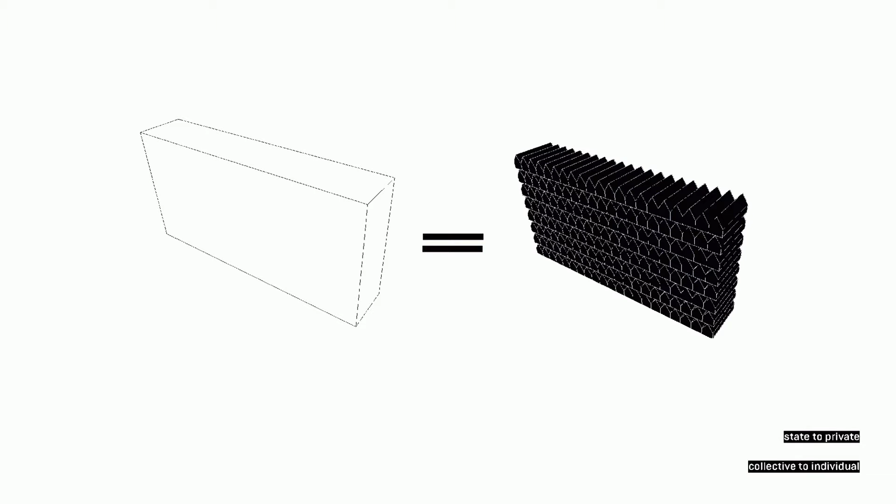So as this image shows, there has been this shift from queuing due to scarcity to queuing because of hyperconsumerism. And there has been a shift from this thinking of extreme collectivism to extreme individualism. There has also been a shift from everything completely state-owned to everything completely privately owned.

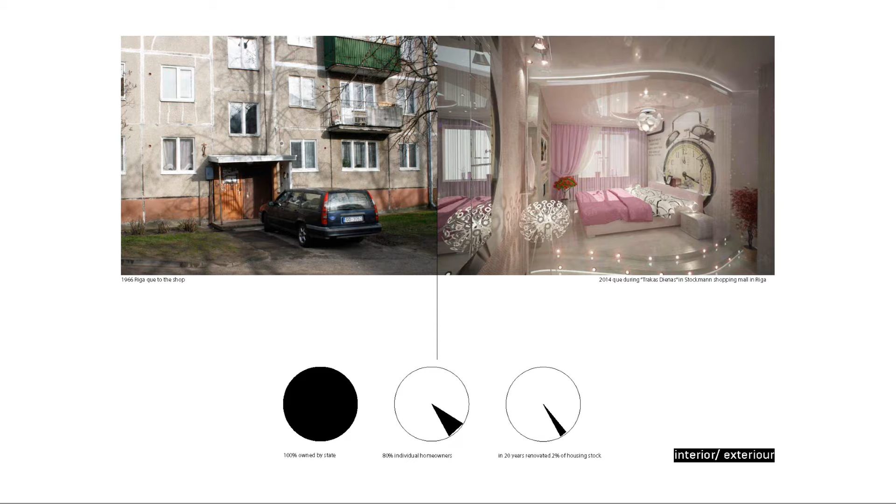And as many images have shown before, like Dean showed, there's an obvious urge to renovate and to improve your home conditions, but there's also this unwillingness to cooperate, which has led to the fact that only 2% of the exteriors have been renovated. And you can see this obvious clash between these highly designed interiors and these very bleak exteriors.

And if we look at the current economic conditions of Latvia, Latvia is one of the poorest countries in the EU and has one of the lowest median incomes. But there's also quite a high income gap, so some people do have money and some people don't. And there's quite a high percentage of people living on the border of social exclusion.

So this leads us to our urban analysis, because we were interested in seeing how this economic history is reflected in the urban tissue of Riga. At the beginning of the 20th century, Riga was mostly centered around the city center. But during Soviet times, heavy industrialization led to the expansion of the city. And there was then the need to house the workers, and the idea that you should live and work in the same place, i.e. the development of the microrayons.

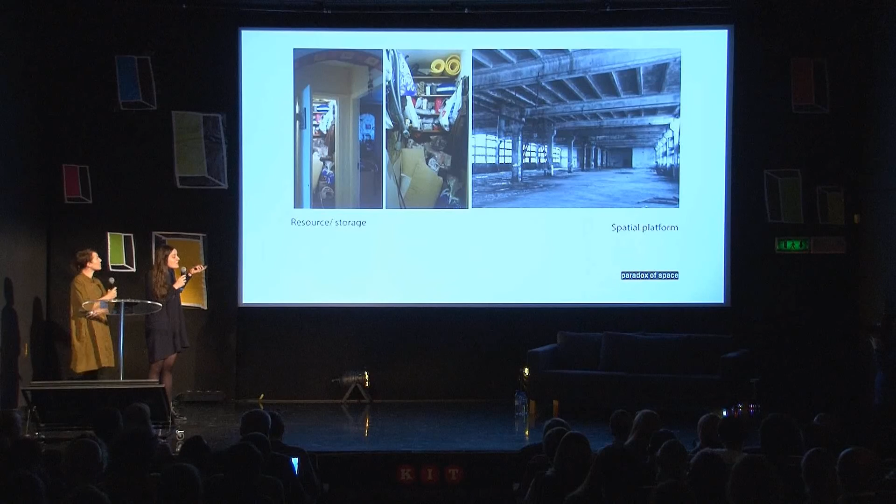So what we were interested in is this paradox of space which occurs between the extremely densely populated and cramped typical mass housing units and these abandoned industry sites. So we were looking at the cramped in terms of things, but also in terms of activities which take place there. And we were looking at what of this could be taken out of the domestic four walls and benefit from it.

So what we're proposing is not just looking back, but actually looking to the future, because many thinkers now are thinking, what shall we do after the crisis, what are the ways of developing beyond capitalism, and what could be the way of sharing our resources, both material and immaterial, in a more collaborative way.

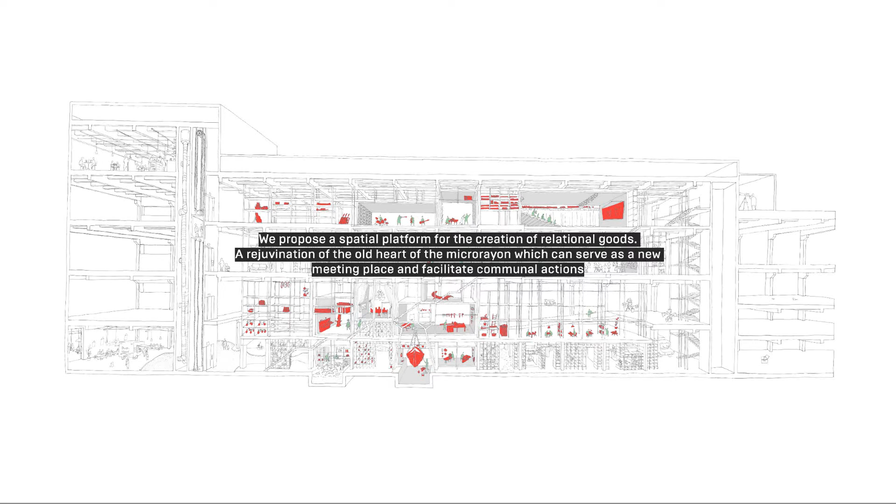But what interests us most is not just the material benefit people would get from it, but the relational goods which evolve from sharing things. That's actually about building community around things. So what we propose is a spatial platform for the creation of this relational good in an old factory, to become the heart of a microrayon and serve as a meeting place and facilitator for communal activities.

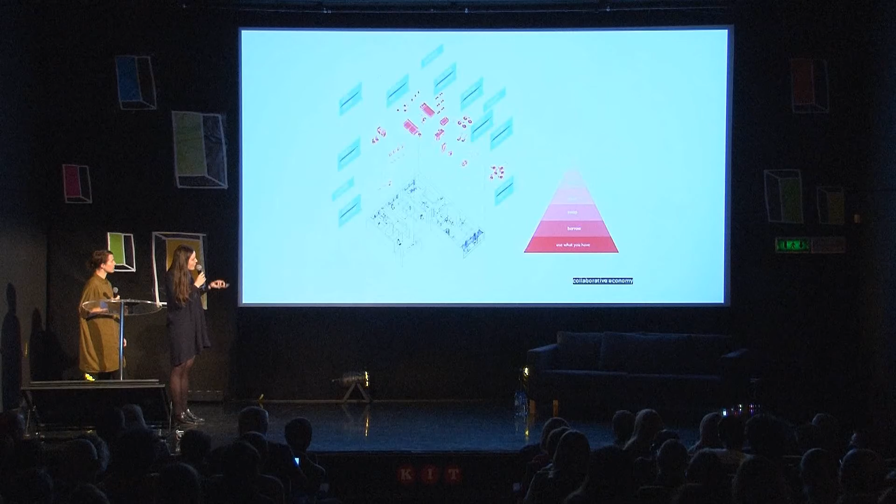So what we did, we analyzed the cases of our friends and the people we know from microrayons, and looked at the objects which could be outsourced. For example, children's toys which you don't use anymore, tools which you can share, kitchen equipment, wearables, and also immaterial things like skills or favors.

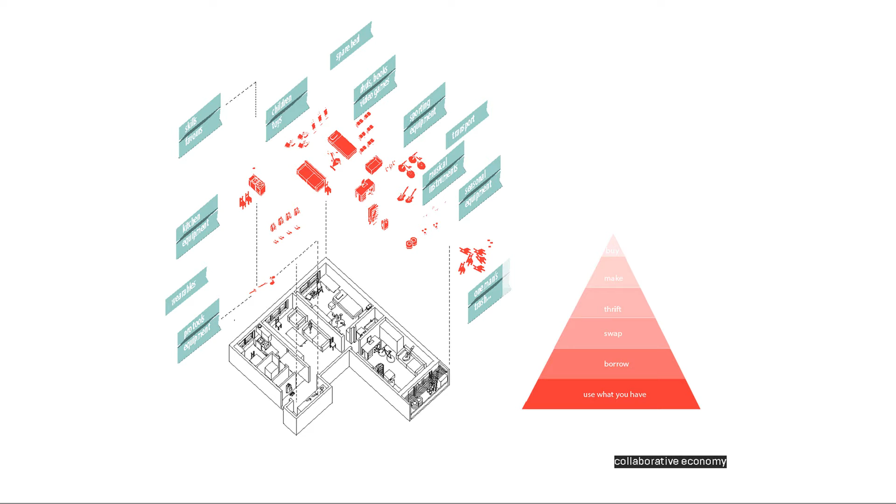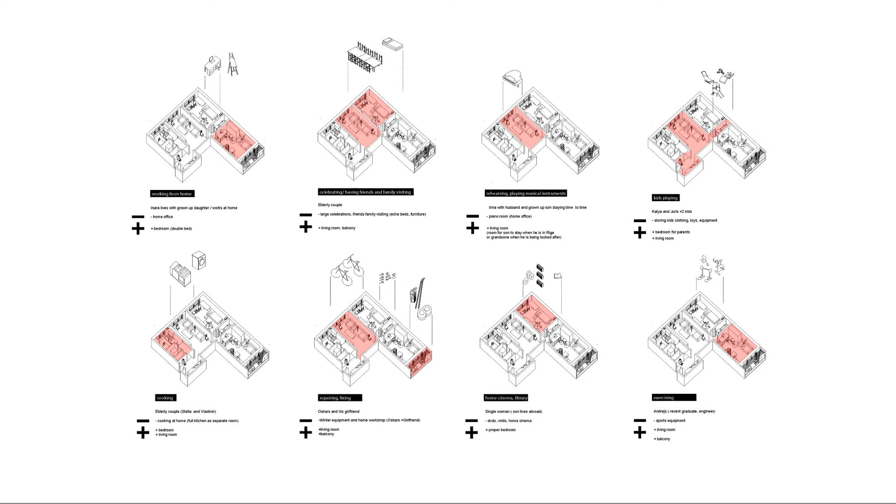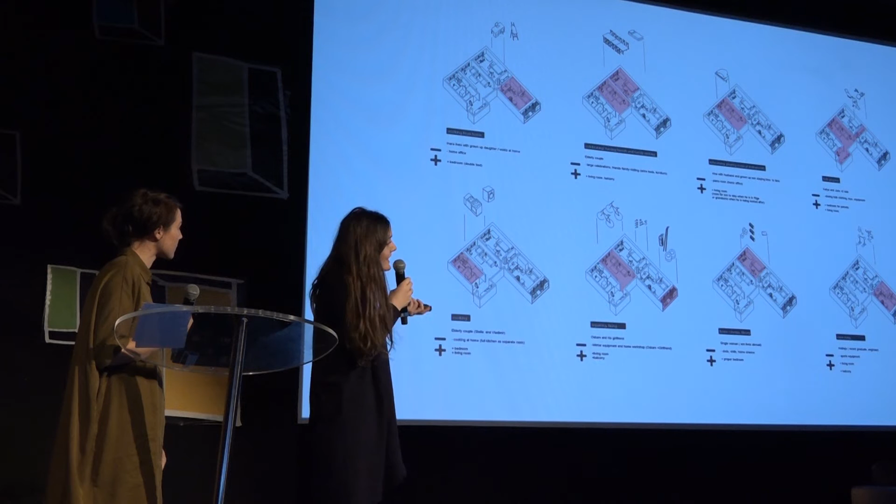And then we looked in terms of activities which can be taken out and take place in larger communal spaces. But the main question we asked was, why would people be interested in sharing? First, they need to see some benefit for them. They would improve their living conditions, and also get access to many more tools and services.

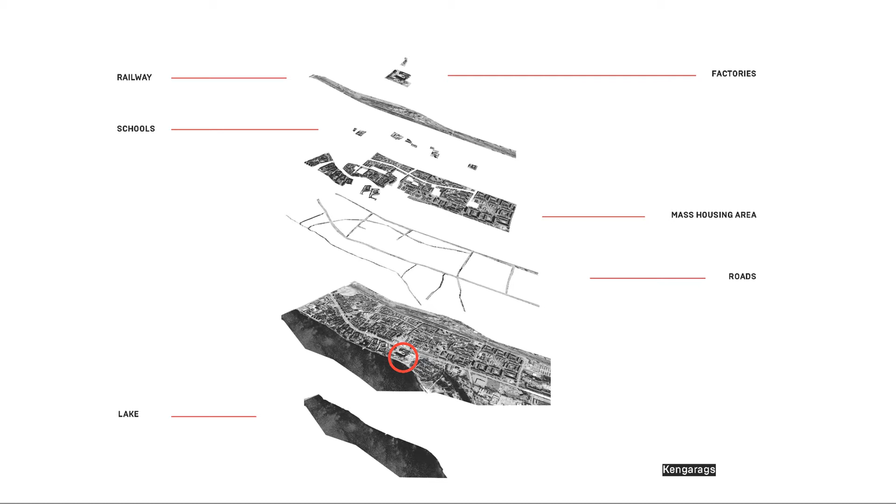So you've seen the situation on a whole map of Riga. You have lots of abandoned factories, but we've chosen our site, Kengarags, which is only 20 minutes away and has 53,000 inhabitants. So here you see the urban fabric with factories, railways, schools, the mass housing area, and the lake. So that's the Quadrat's former rubber factory, which has 24,000 unused square meters.

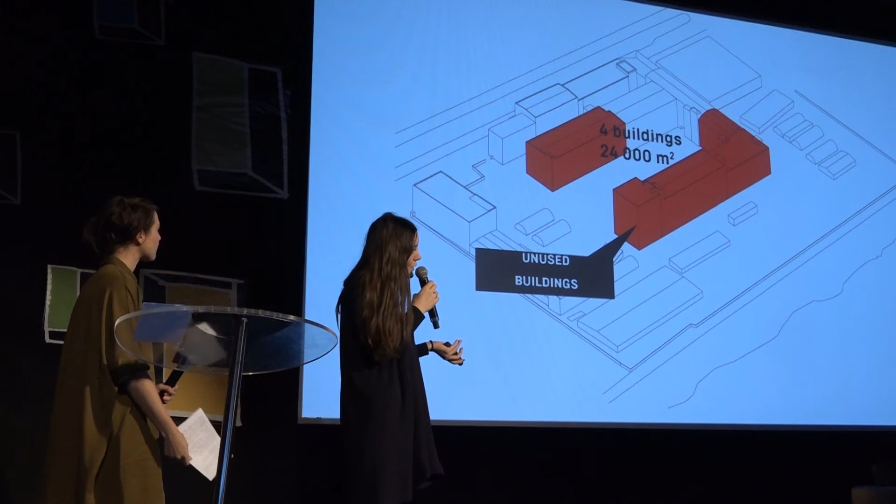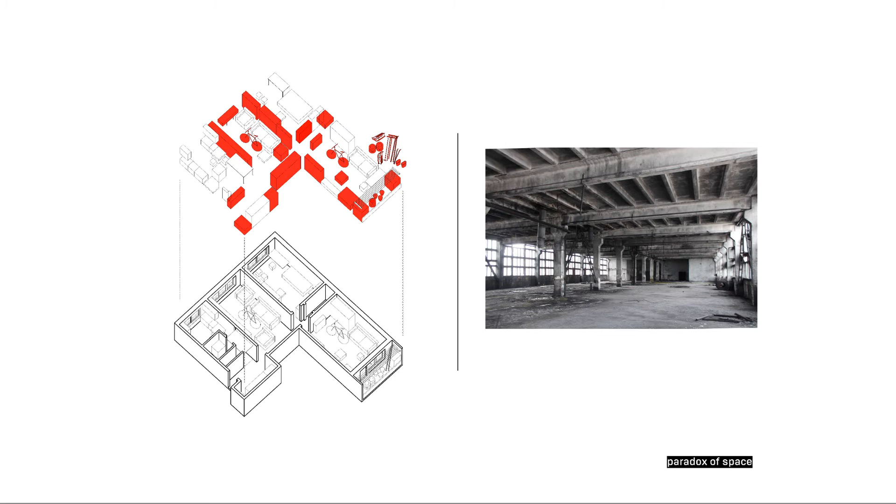So what we propose, I will talk first about the program. So basically, how do we relocate these resources and use them communally? So the main program is based around storing things, but we see storage not as something passive, but as something which can be shared, reused, and what is someone's waste can be a treasure for another one.

So here is an example of how it could work, for example, with tools, which you actually use about once per 2 months, and which can be relocated into the factory and then become a workshop. At the same moment, freeing up your balcony.

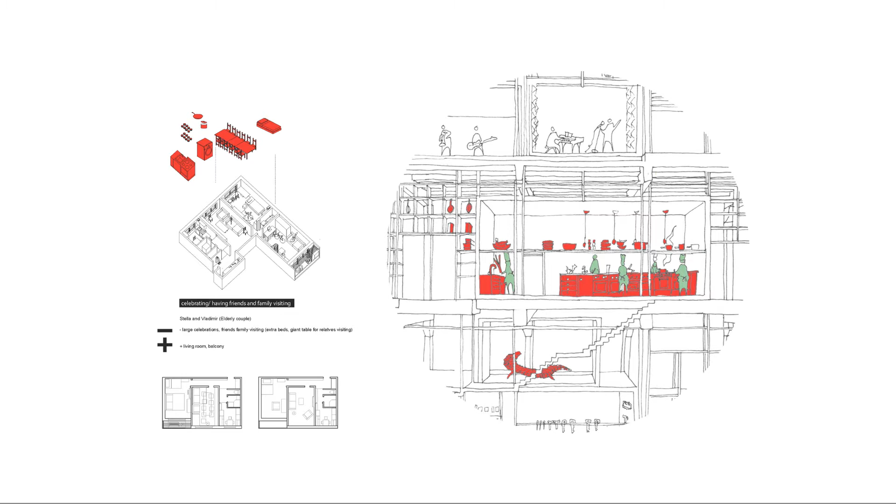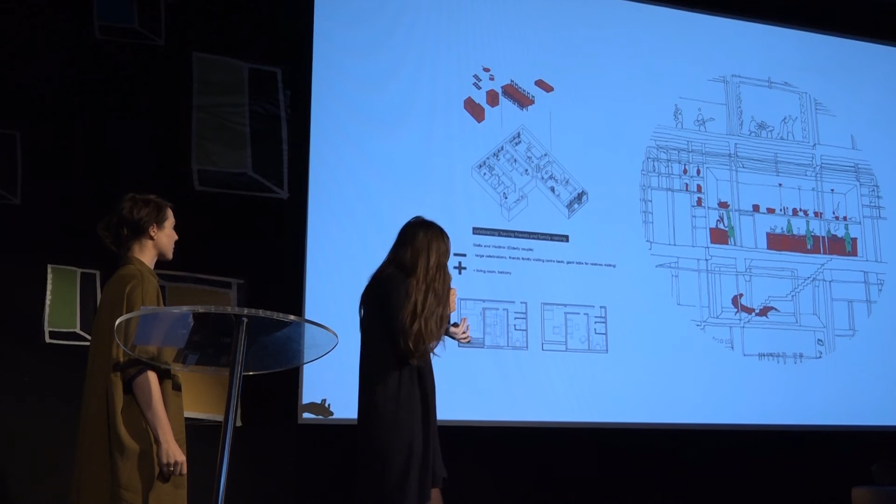Or for example, all the kitchen equipment and the tables, the furniture you use for a bigger celebration. When they're taking place communally, you could allow yourself a much bigger space and bigger access to all this equipment. Or for example, a working space, when transferred from a separate unit into a communal space, becomes a co-working space. And actually the benefit is not only access to the printer and computers, but as well access to the network.

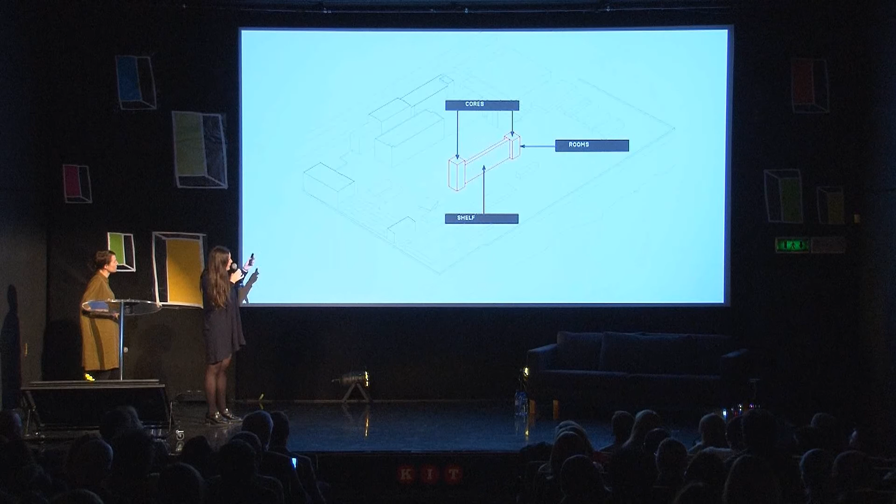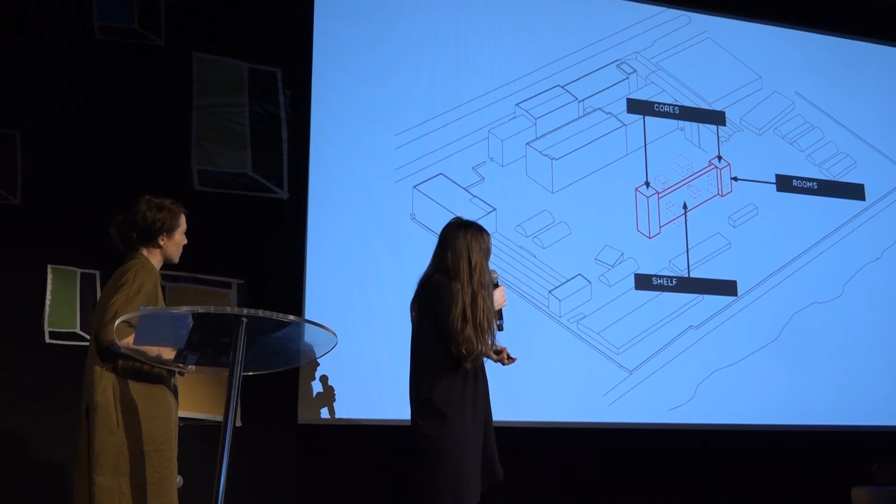And of course, children's toys and equipment we see as an amazing potential to be shared and reused in many ways. Now talking about the building itself. So we see a building as a shell, and we don't propose a classical renovation which would be extremely expensive, but something which would actually be affordable. So we would reuse the old cores and then integrate the shelf for the storage and insert the rooms within it. So as I already mentioned, we treat it as an outdoor space with an internal street which goes through all the building.

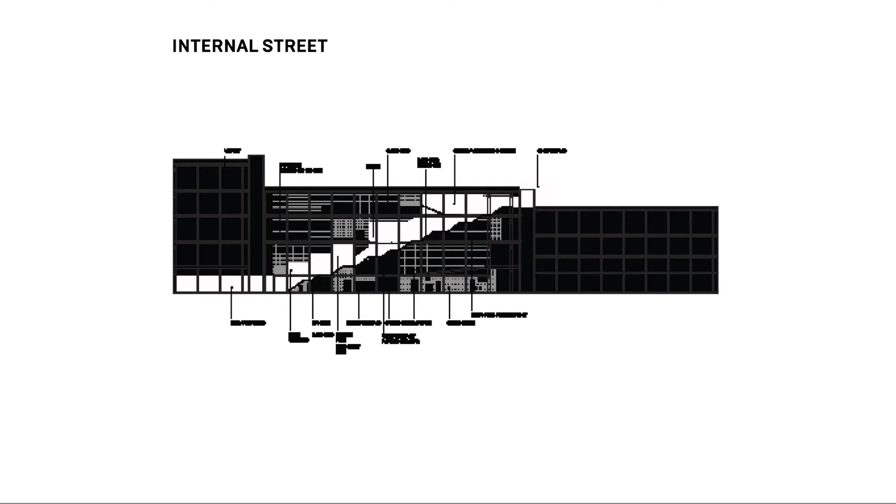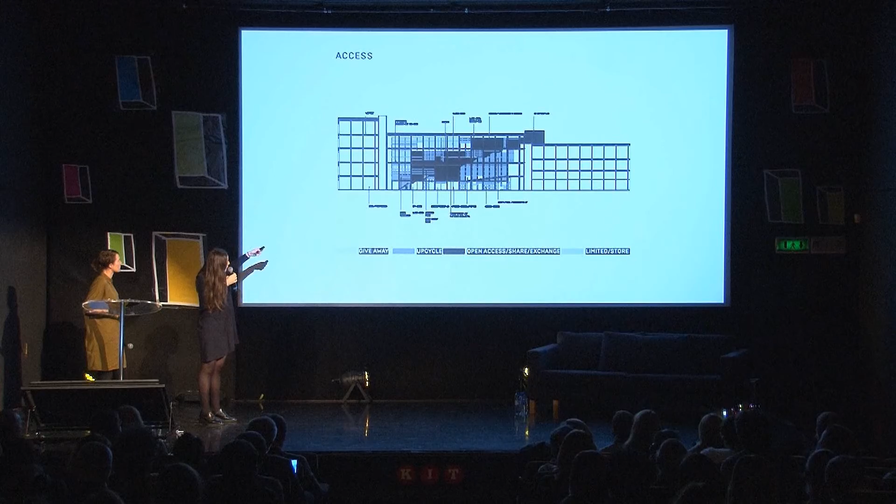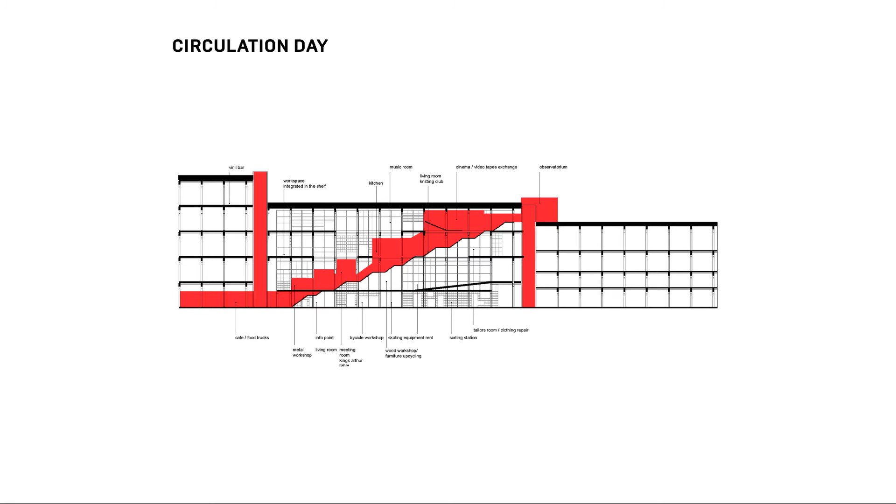How the access works: because of course some things can be just given away, but some should be rented or reused, the shelf can be closed or opened. So here you can see how the shelf is divided along the staircase with the open access, then with the giveaway parts, upcycling, and then a limited one for storage. Here are the rooms I explained before. And this is how the circulation would happen, with the elevators, the stair through all the volumes.

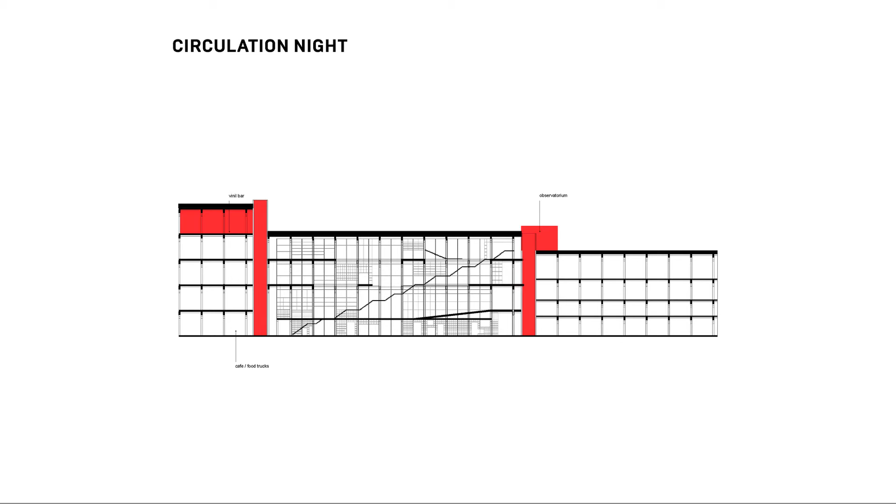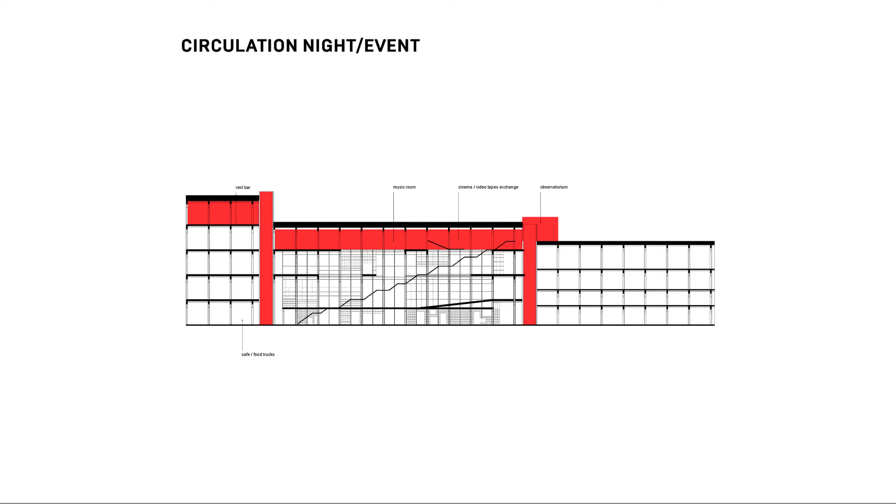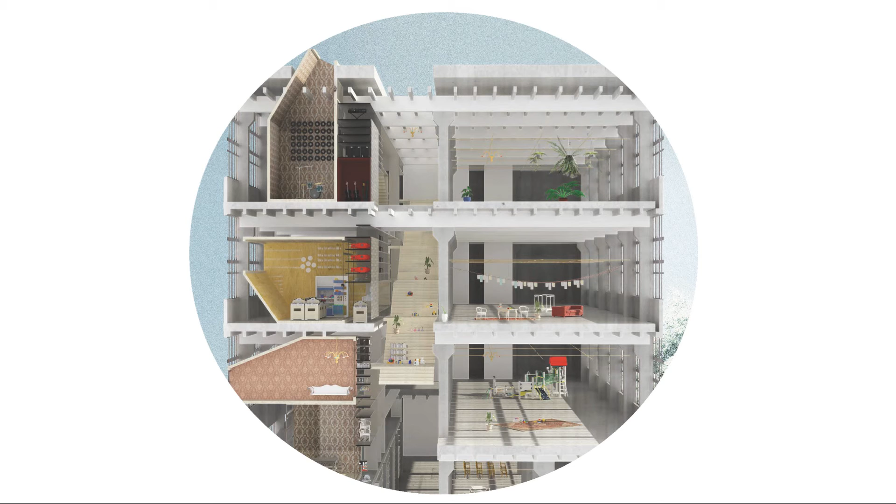And circulation at night, because you obviously don't need only the place, as we call vinyl bars, where you could exchange your old CDs. And for example, the music room on top, as well using the roof potential. And the event space, where we could open up the top floor as well. We imagined this as a staircase and the shelf, and one side is more densely populated with the rooms, and the other we will leave open for expansion. Treating everything as an outdoor space, we don't touch the shell of the factory, we just conserve it, and then we put the insulated rooms inside.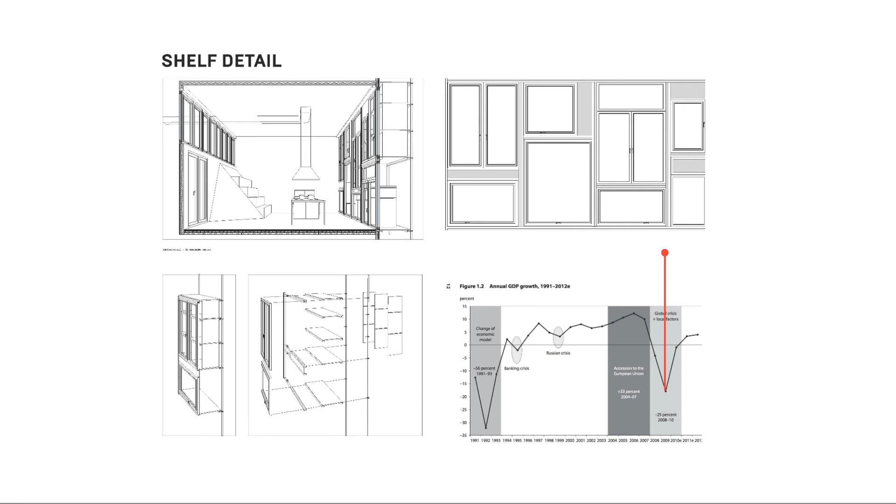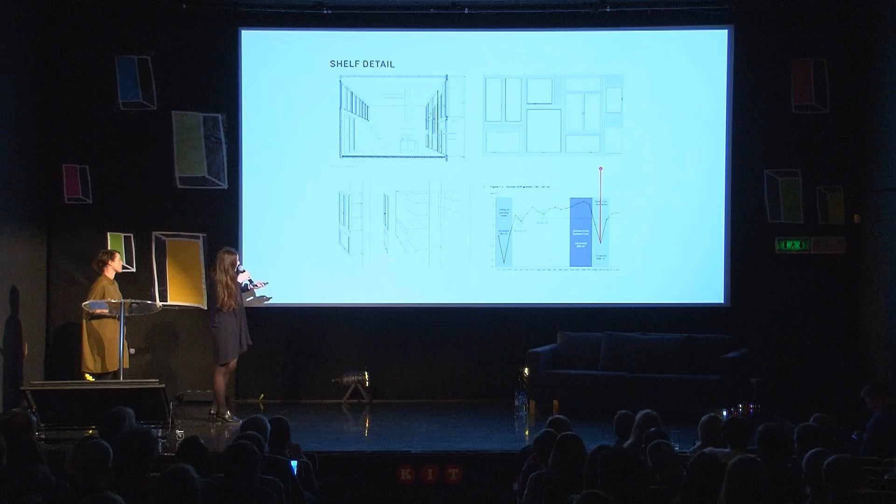That's a detail of the shelf, how the shelf is connected to the unit, and we proposed as well to use the collapse of the economy in 2008, when we had a building boom and many buildings were already started in Latvia and windows were ordered. At the moment you can buy lots of them quite cheap, but of different sizes. So we thought how could we reuse this existing economical potential. And the landscape strategy.

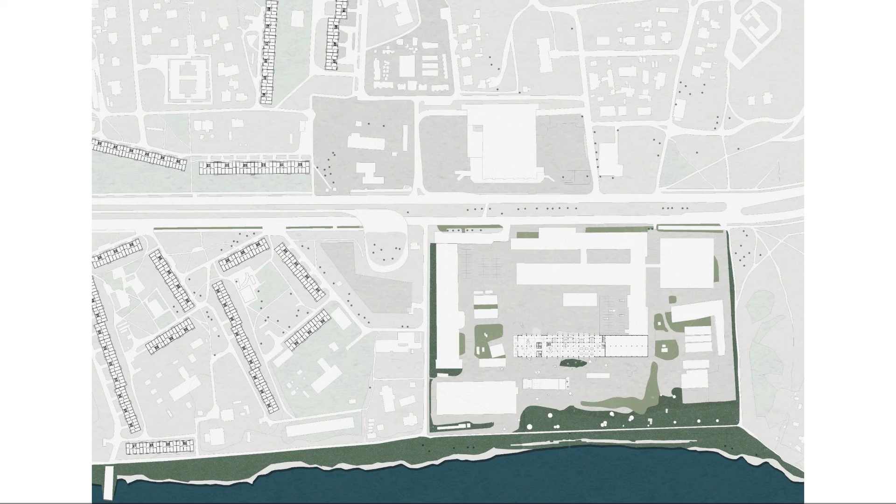So we decided to treat it almost as an outdoor space, where we would allow the existing landscape to creep in and inform the design and landscaping of it, in particular the access to the ground floor. So this is a site plan of the current conditions, where you can see the site here, which has some green elements, but it's quite visually shut off from both the shopping center, which is here, and the surrounding micro-rayons and the promenade, which goes here.

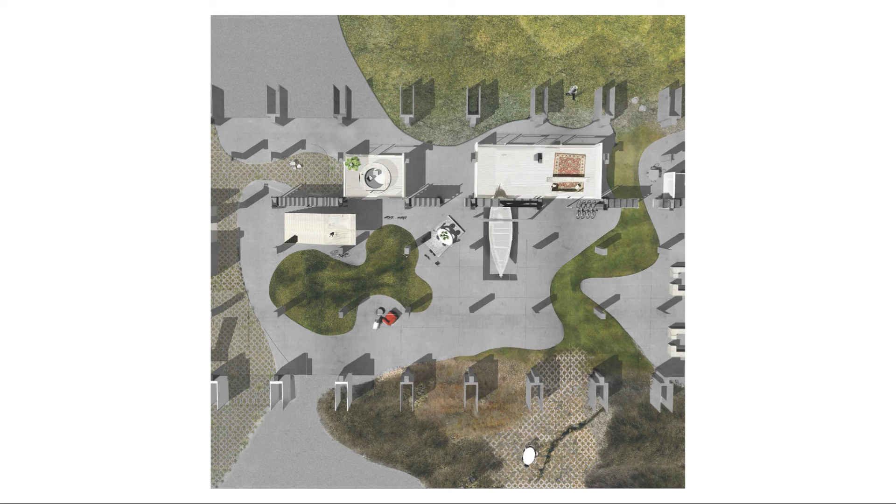And if we zoom out and discuss possible scenarios, we would propose an urban development which is focused not only on the city center, but on the micro-rayons as a whole, to develop a more multinodal idea of urban development, not so city center focused. And because there are factories scattered all around these micro-rayons, we believe that this programmatic scheme could be implemented in more sites than our proposed one, to actually create a more livable city for the whole city and not just the city center.